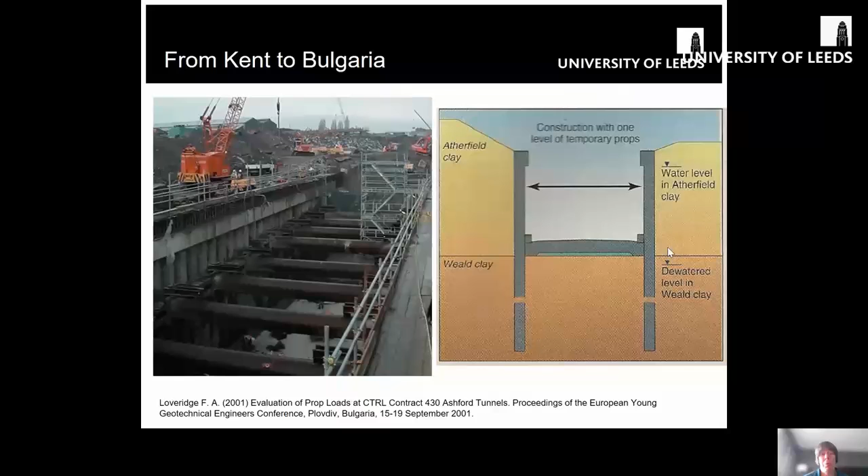I was at EYGEC presenting a paper. The paper was about propping of deep excavations from what we then called Channel Tunnel Rail Link, but went on to be called High Speed 1, the construction of the first high-speed railways in the UK. I was on secondment to Skanska Construction, and part of my role was to calculate the prop forces in excavations such as these shown here, and work with the observational method and monitoring of the prop loads and wall deflections to check everything was happening as we expected.

By conducting this review, we were able to justify the use of the distributed prop load on upcoming schemes, not only saving time in terms of design effort, but also saving time in terms of construction and cost in terms of the size of the props that we could use. Now, at this time in my career, I have to say, I wasn't really thinking about the big issues of the world. I was just getting on with the excitement of designing things that were getting built and seeing civil engineering structures come to life in front of my eyes. It was a very formative time.

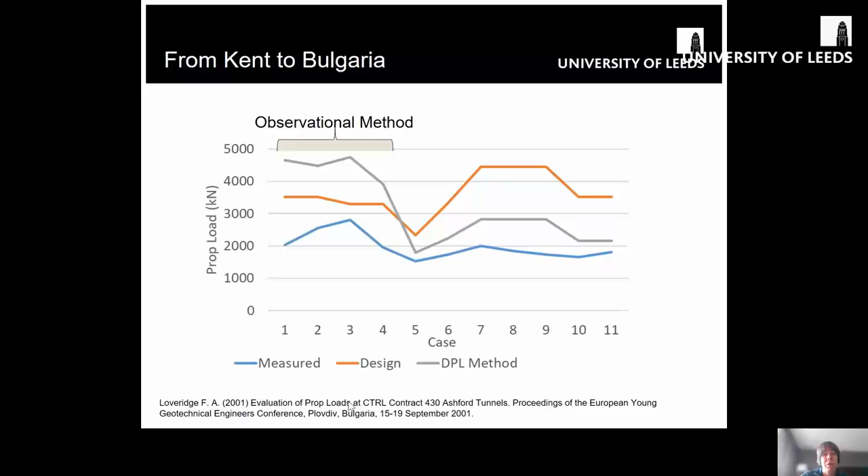After I finished on site, I went back to the office and I worked for Mott MacDonald in their office in Croydon, just south of London. And sustainability became something of a theme. At that time, we were mainly defining sustainability in terms of the Brundtland definition, the balance of economic, environmental and social factors. I was asked to lead an initiative called Managing Sustainable Companies, or MASC. It was an initiative that was developed by the Building Research Establishment and the Construction Industry Training Board in the UK.

The basis of the idea was that sustainable companies would make more efficient use of resources, prevent harmful and potentially irreversible effects on the environment developing as a result of their business, and respond to people's needs. And that's not just people in the community, but also the employees of the company and all the supply chain employees that we engaged with.

Effectively, it was a business improvement initiative, and we looked at how we were doing against a number of important indicators and developed plans for how we can improve. The aim being to develop a company that developed and demonstrated corporate social responsibility and delivered financial benefit, as well as improved corporate image, and maintained a competitive advantage through these kinds of innovations.

It was great to be working in a culture where these kinds of things were our aims. And I think you can see that in a couple of the projects I'm going to present in a moment. Around this time, I was fortunate enough to be working on the design of the new Wembley Stadium in London. This is one of the iconic football stadiums in the world, and as part of the construction, there were level changes on the small site.

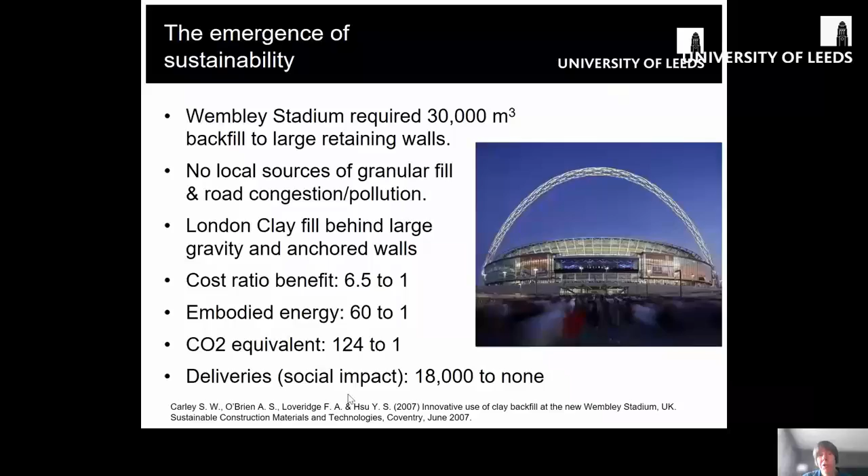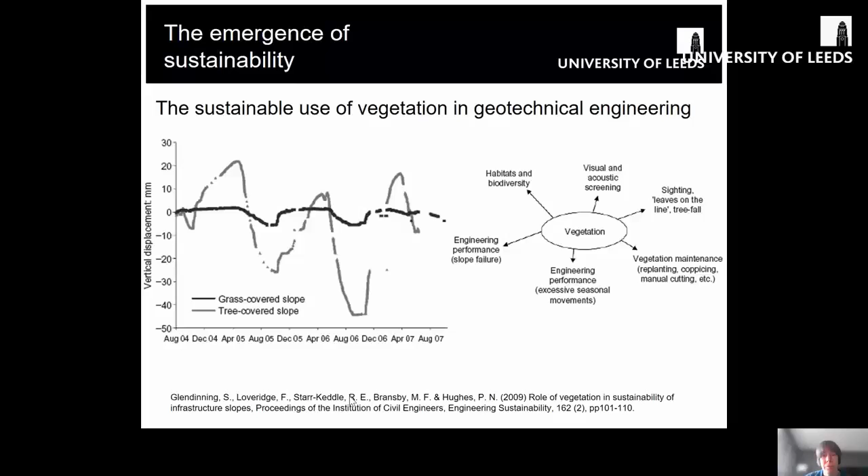Hence, there was a bit of a catch-22 and a trade-off between the positive and negative benefits of using vegetation. We also needed to think about other potential benefits of vegetation, providing habitats and green corridors within cities, as well as visual and acoustic screening. It was the start of beginning to think about geotechnical engineering in a different way. I also started to get involved with work on the energy challenge.

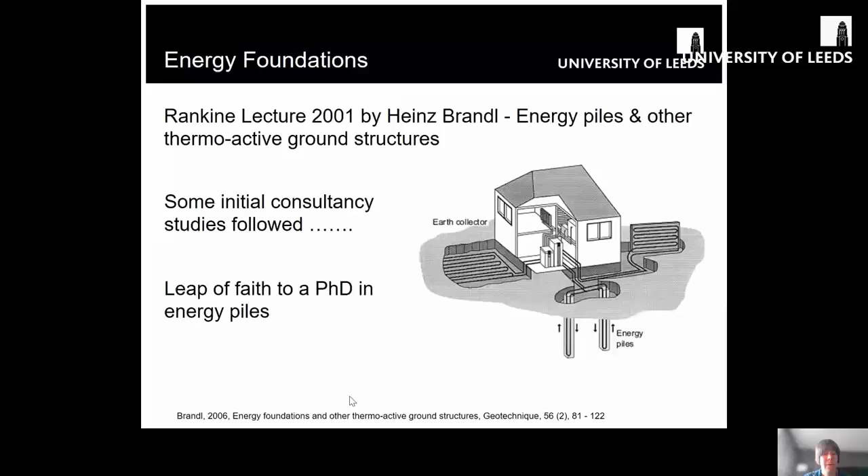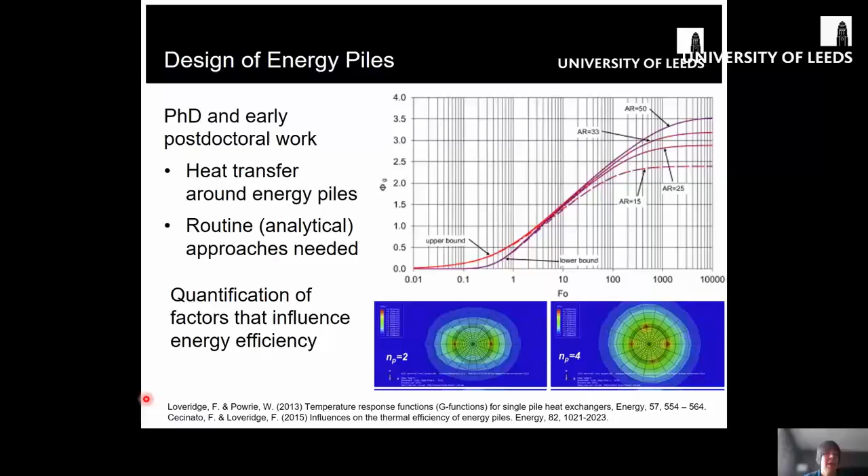I also did some work looking at the factors that quantified that influence on energy efficiency. This was based on numerical simulation and showed the importance of making sure we put enough heat transfer pipes within the piles to really draw the benefit from the greater heat capacity inside large foundations.

Recently, I've been involved in an assessment of the potential to get heat from buried infrastructure in the UK. In the UK, we have about 28 million homes that need to be decarbonised, moved to low carbon heating systems. Each of these homes needs about 15.5 megawatt hours per year of energy. And we worked out that we could get 7 terawatt hours per year from drainage associated with housing developments and around 2.5 terawatt hours per year from sewage systems connected to homes.

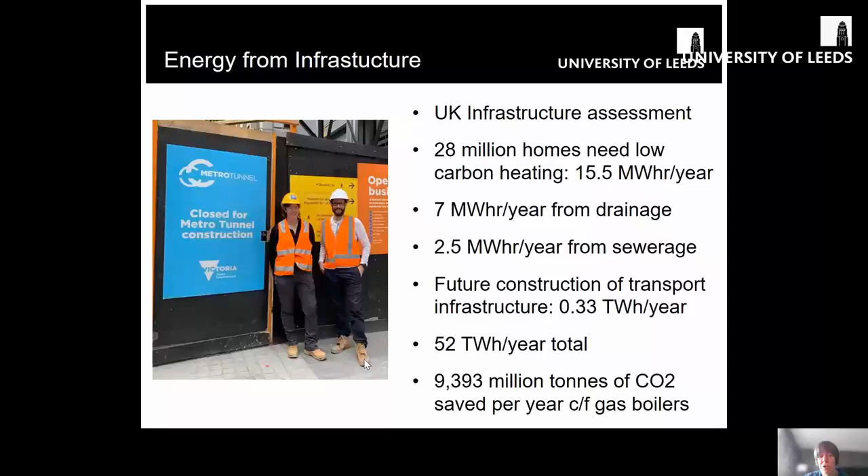Future buried transport infrastructure construction could deliver a further 0.3 terawatt hours per year of thermal energy. And when you sum this all together, that's 50 terawatt hours per year in total. Interestingly, the transport infrastructure, like tunnels, metro stations, things like that turned out to be a relatively small component compared to drainage and sewerage systems. And these are much closer to homes and offer a real potential for exploitation in the future. And the potential energy and carbon savings from this strategy could also be huge when compared with existing gas boilers.

The next step is to reimagine how our entire cities look in terms of how we heat them. We could have all sorts of energy geostructures, tunnels, metro stations, sewers, all equipped for ground heat transfer and storage and connected to district heating networks where we can connect industry, waste heat from data centres, different sorts of public and commercial buildings, and other sorts of ground energy storage like aquifer thermal energy storage or borehole thermal energy storage, all circulating fluid through a low temperature network. This is a vision of the future we should be trying to achieve.

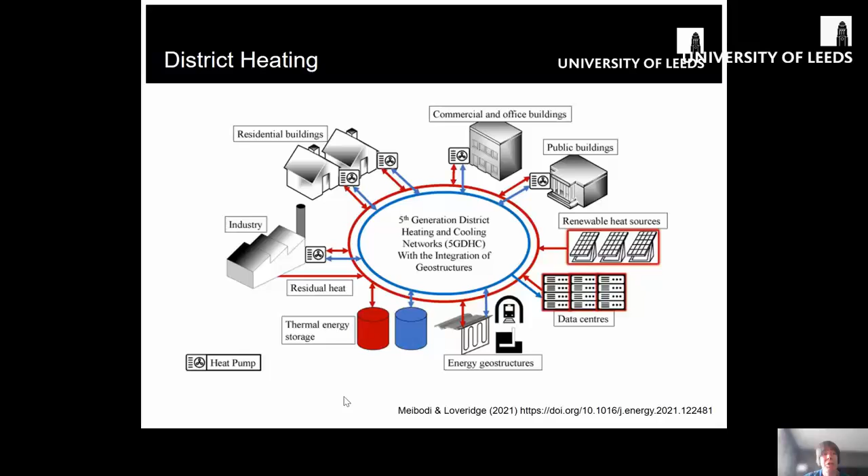But it's not always possible to get things delivered just by getting the ground engineering right. We need to think about where things sit in a policy environment as well. I've recently been involved in a project looking at the issue of ground heat exchangers that are shared. This is where a number of houses or tower blocks are connected to a shared ground array to extract heat from the ground, as opposed to an individual ground source heat pump system on the left or a district heating system that I've just mentioned.

However, currently in the UK at least, there is not a good policy environment to support these kinds of developments. The government's recent strategies for heating and buildings focus very much on one end of this system or the other end of this system. And there just isn't anything there to support the development of these mesoscale systems. So we have a lot of work to do, not just getting the geotechnical and ground engineering right, but also communicating what needs to be done to wider audiences and engaging with policy to help shape a better future.

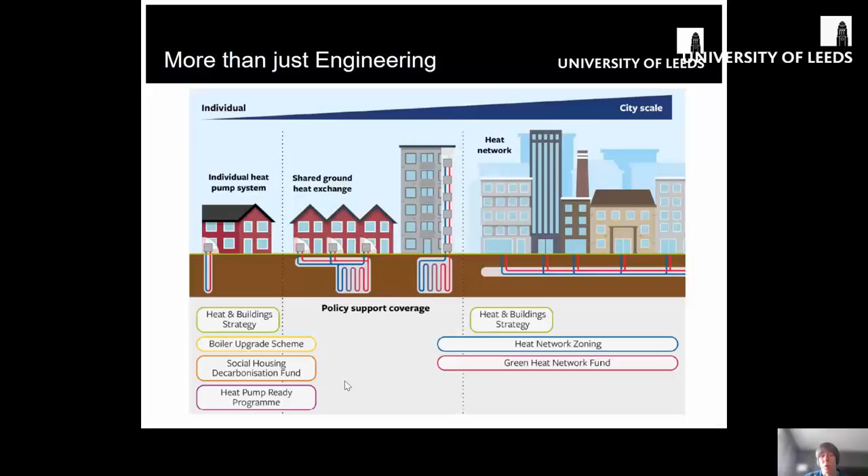Another big challenge of the current years is climate change, of course. This is very relevant for lots of areas of geotechnical engineering. I first started thinking about this when I was still working in consultancy. I've already mentioned how we were thinking about how wetting and drying cycles impact earthwork performance and how shrinkage and swelling might affect clay embankments. But here are some summaries of other processes that might be relevant.

We've got precipitation, which can either infiltrate or evaporate into earth structures. Seasonal variations that can cause slope deformations, maybe serviceability challenges that I've mentioned, but also ultimate limit state issues, actual slope failures caused by raised pore water pressures in winter, all of which can lead to unacceptable performance of geotechnical assets.

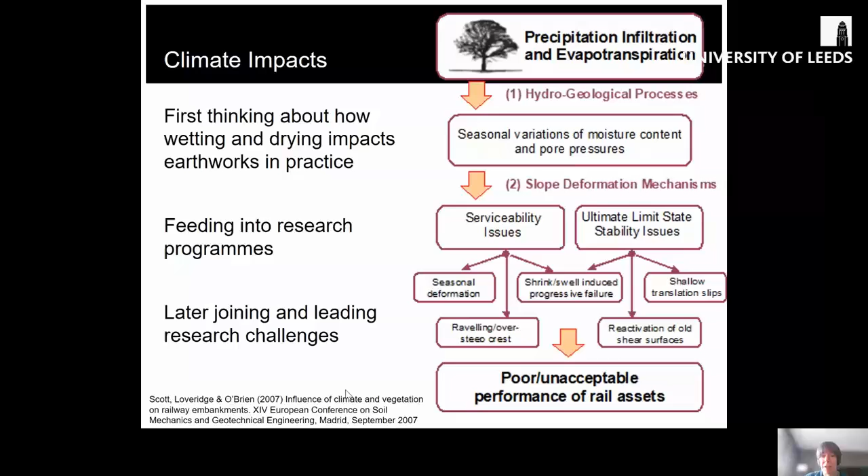Whilst I first started thinking about these things as a consulting engineer, and at that time also started feeding into research programs as an industrial partner, since I've gone on to become an academic instead, I've later had the opportunity to join and lead research challenges in this area. I'm just going to mention a couple of things that are ongoing at the moment.

I'm part of a large program grant called Achilles, where we've been looking at the deterioration of high plasticity clay slopes. Some work of my colleagues in this program is shown here. We've got the results of a centrifuge test by Andy Take with vertical displacement and horizontal displacement for a clay slope, with the black dots being the centrifuge results and the red lines being numerical simulation that's been validated against that centrifuge test.

That validated model has then been used to look at what happens in the future if we project forward the behaviour of clay slopes with climate change. What we're seeing in the bottom chart is the mid-slope deflection of such slopes cast forward many decades, first of all with weather sequences applied from the recent past, and then with a number of future climate scenarios. You can see that the point at which this line goes vertical, or the slope might fail, depends on the climate change scenario that we've selected.

And the amount of rainfall required to trigger the failure depends on that too, with more severe climate change scenarios bringing failure sooner and less severe climate change scenarios bringing about failure later in the future, but requiring larger triggering events to develop them. This is because what we see due to these stresses and strains and displacements in the slope is a gradual deterioration of the soil properties.

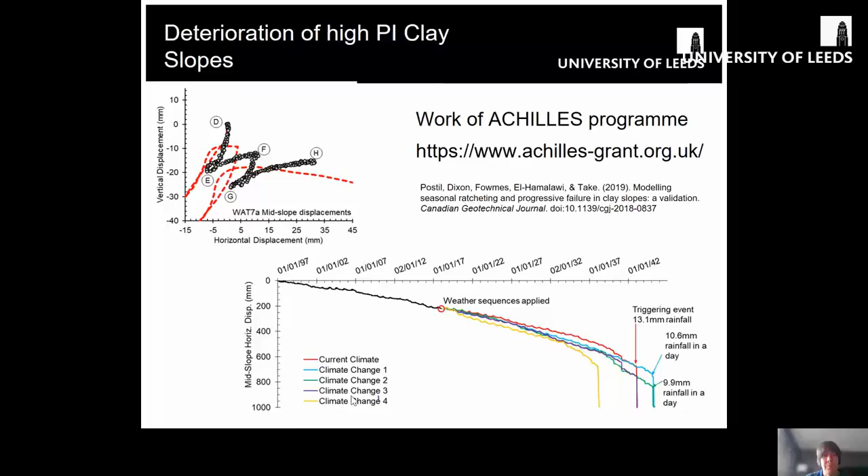We know that soil shear strength against shear strain looks something like this. We have a peak, a critical state, and ultimately a residual strength. Currently, we design most slopes for critical state, which is deemed to be a safe and conservative approach. We tend to pick a set of strength parameters and a set of pore water pressures and apply them as static in our models with a factor of safety.

But as we think about how slope parameters deteriorate with time, if we can use numerical simulation like I've just shown to quantify the changes in displacement or factor of safety with time, we can also use it to tell us where we are on this curve. We can think about it almost as a deterioration curve.

And if we do that, and we categorize the horizontal axis as time, age, or the number of wetting and drying cycles of a slope, we can start to develop design charts like this example here, where we have slope angle against time, a critical state design line, which does not vary with time, and a design life based curve, where we can say, if we have a short duration slope, we could get away with a steeper slope angle. And if we have a longer design life, we would need a shallower slope angle.

And I think this idea is quite revolutionary because we're used to thinking about design of other elements like steel in this way and sacrificial thicknesses. But it's very rare that we actually quantify design life for geotechnical slopes.

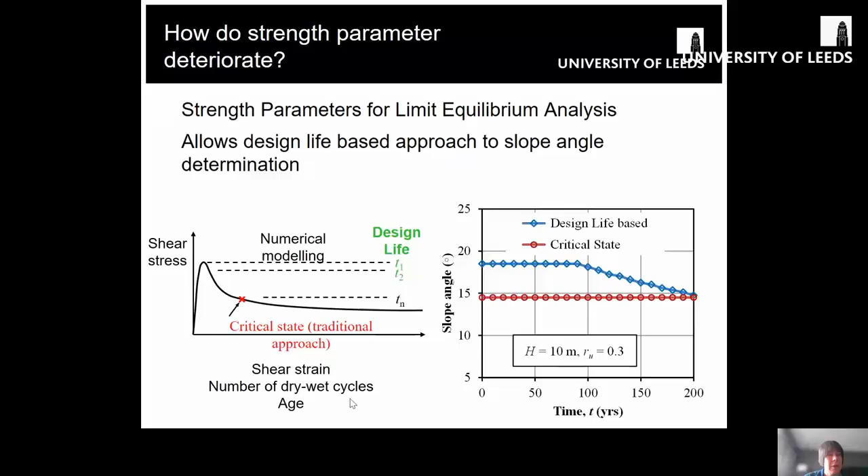At the same time, the potential evapotranspiration is going to go up, especially in the summer. This means our summers are going to be drier and our winters are going to be wetter, and we're going to have an increase in high intensity storm events. So what does this mean for our pore water pressures?

What we can see is that in almost all cases, the slopes are going to have greater potential for infiltration in the winter, with an average of about 6.2%. And in the summer, they're all going to have an increased potential for net evapotranspiration, with an average of 17%, up to an extreme of 45%. So there will be greater potential for net infiltration in the winter, but it will be exceeded by the potential for evapotranspiration in the summer.

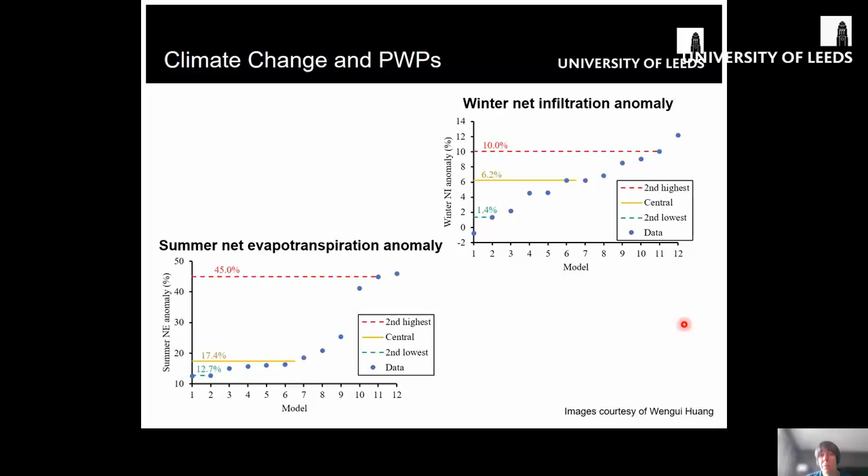Finally, I'm going to give a few thoughts towards the future. Increasingly, we need to think about resilience of our infrastructure, including our geotechnical infrastructure. I've talked a little bit about how climate can affect strength and pore water pressure in constructed slopes, but the issues are not limited there. Natural landslides are also susceptible to climate change, and we need to think about their future resilience.

Flood defences are going to become increasingly important because we're going to expect higher and more frequent sea and river floods, and our defences need to be resilient to those events. Integral bridges may see increased expansion and contraction with effects on earth pressures behind abutments. Permafrost may thaw. Therefore, we really need to develop frameworks for resilience of our infrastructure, use risk assessments carefully using climate change scenarios in the future.

The final thing about resilience is it's not just about climate. We need to think about change of use or loading as well. Many sorts of infrastructure are going to be used more, for example, by heavier vehicles or heavier trains in the future.

Along my own personal journey, I've mentioned energy geotechnics, particularly related to energy piles or energy from other buried infrastructure. This is already a technical committee and theme of the ISSMGE, and in fact I'm recording this presentation for the conference while I'm at the International Conference for Energy Geotechnics in San Diego. Energy geotechnics is a really interesting area. There are two particular ways we can think about it. We need to do things like bring old skills to new problems. For example, the design of foundations for offshore, onshore wind or other energy structures.